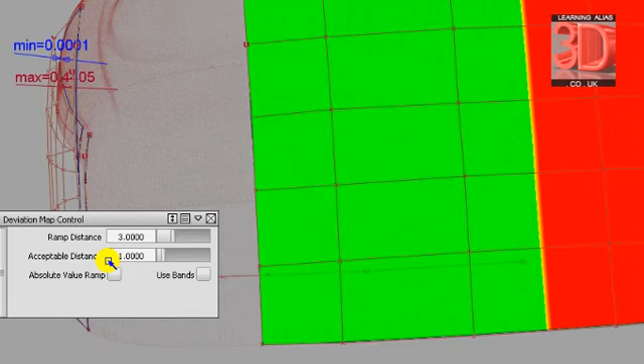You can see that with a mesh tolerance set at 1mm, everything looks good here. But when you take a good look at this surface, you'll see that the CV hull distribution is very erratic. So let's show you how to rectify that now.

So get it into the view so you're looking straight at it, but perpendicularly. Take the Planarize Hull tool and we're going to select all.

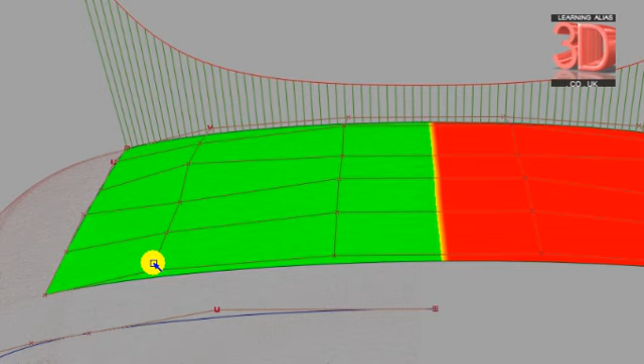You can see in this view that CV is too high. In fact, this row of 3 CVs is too high and this is too low. So that one's too low. So let's just sort that out using NUV here.

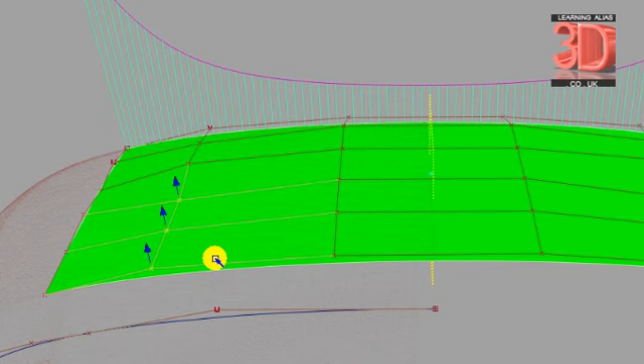Come over here now and use smooth control. Factor 2 is okay, and smooth, and save. So we should have very nice CV distribution. Now you can see we're still within 1mm mesh tolerance.

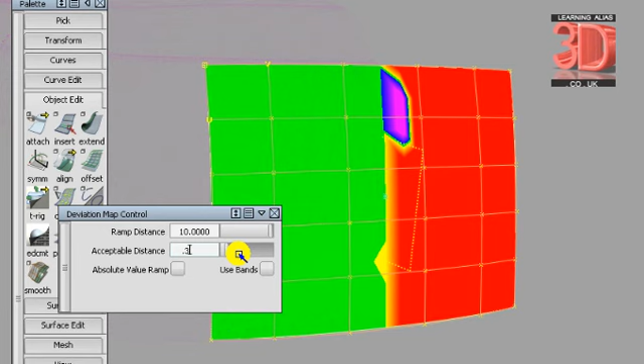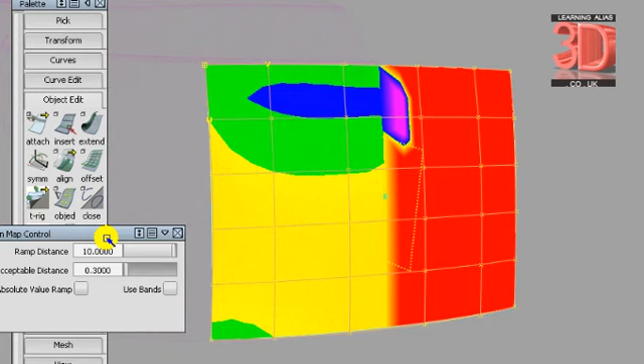Okay, let's change this value to 0.3. Okay, now it looks a lot different, and this is how I normally work, at 0.3. If I work at 0.3 I'm going to get really smooth highlights, even though my boss might be asking me to clear better than 1mm mesh tolerance. So this tends to be the way that professional modelers work.

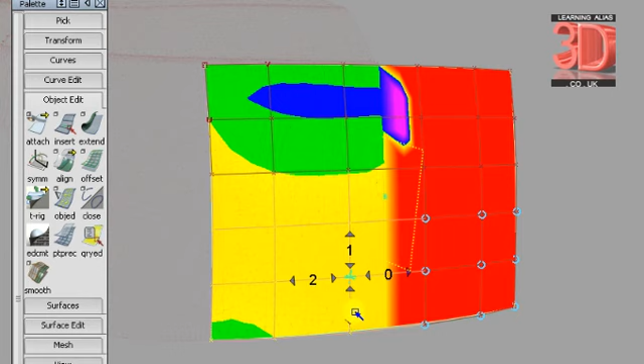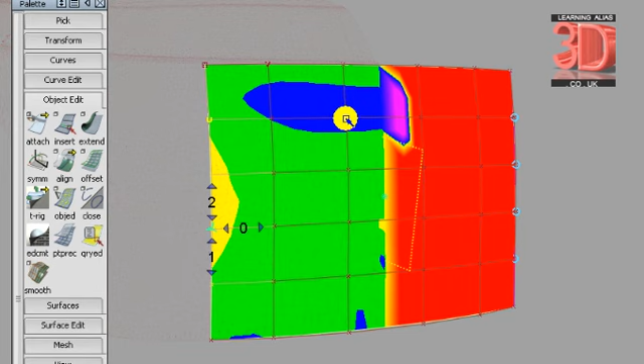So I'm just going to go CV, proportional modification, mouse sensitivity 250, and I think we're good to go there. Got symmetrical modeling on, so I don't have to use this really. I could just pull one CV at a time, to be honest with you.

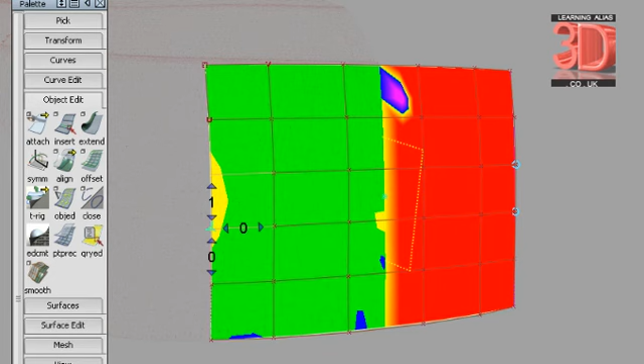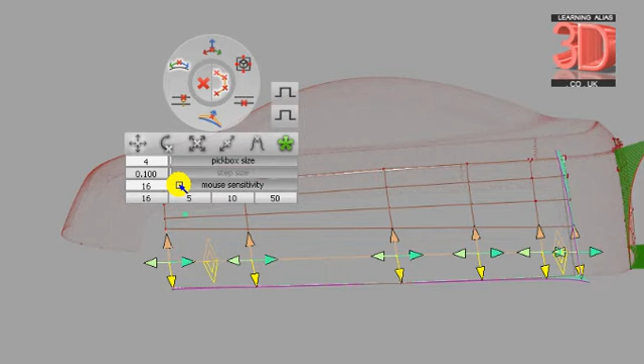You may have your draft surface built right down here, and you don't need that. You want this boundary edge pointing directly at that point there. So let's just pick slide, and you want a bit of sensitivity, about 16, something like that, and pick that diamond and just slide your hull up there.

If you pick this, it will slide the whole thing in parallel, but we want to skew it, so we're going to do it like so. So I'm pointing the arrow at this edge of the mesh. Okay.

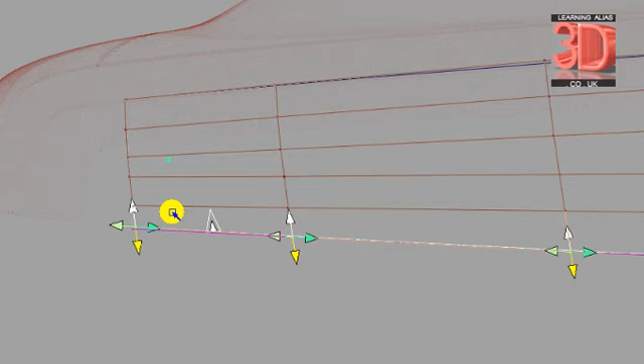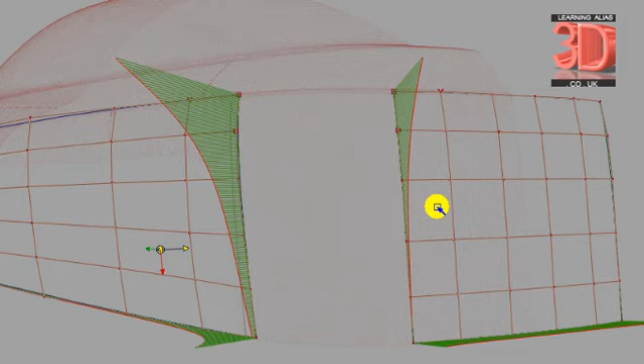So I have a similar character here and here on these two boundary edges, and I want to look to see if they're going to flow round and marry up. It's getting a bit closer. And so we're looking at the arrangement of these hulls there, and I can see there's a bigger gap there than there should be. So let's put in a freeform blend there now. Surface, freeform blend.

Okay, I need to lift this a little bit. And the reason it isn't moving is because I went up here earlier and I suspended rebuilds. So put that back on again and it will make more sense. So as I move that, you'll see that this is moving up now. And we're getting a better alignment, so let's have another look.

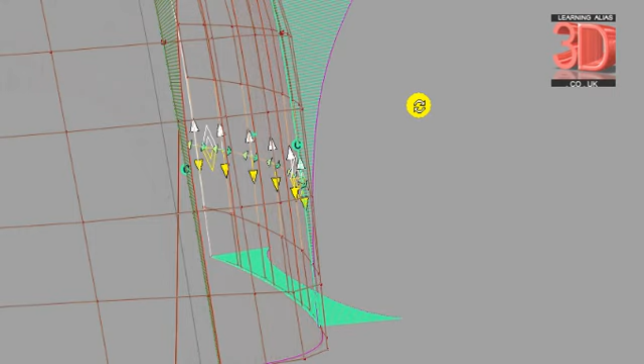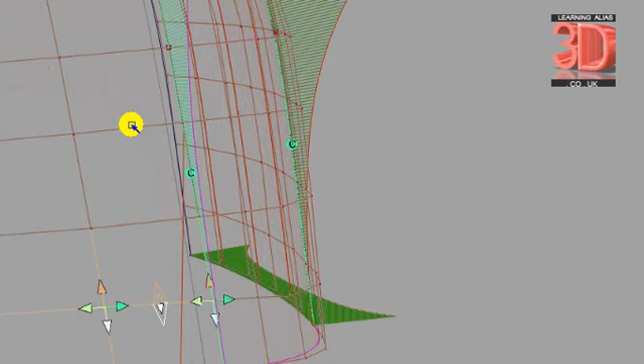So now I'm looking kind of around here, and you see it's dipping a bit there, and I'm going to bring that down a bit, till I get that smooth look that I want. Okay, I like that. So come around, and yeah, it's looking much better.

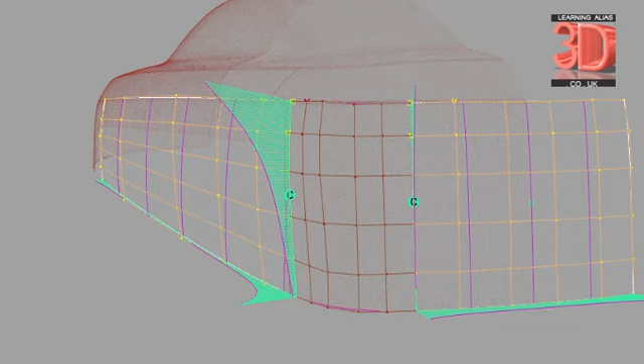I've got some cross sections there that I don't need anymore, so I'm going to come down here and pick the cross section editor. Just hit clear, and it gets rid of all those cross sections which we're no longer using.

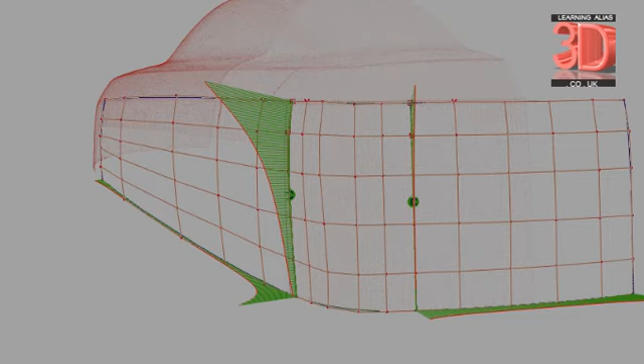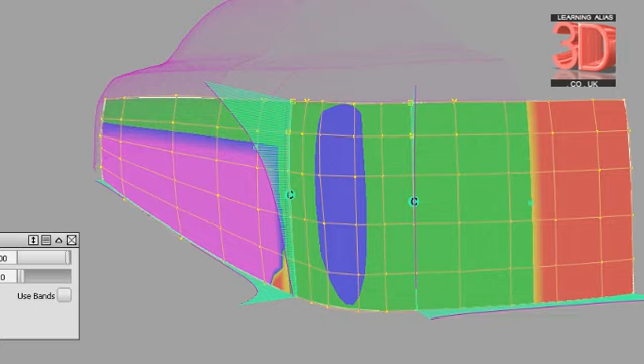Okay, let's have a little look at our deviation map. Let's set it to 0.7. Okay, and it looks okay, apart from this area here, which, as you can see if I come over here, is below the mesh.

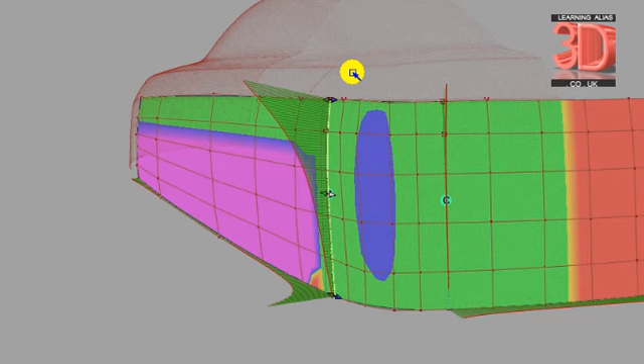So what I'm going to do is take the extend tool with merge on, and I'm going to pick the plane and just gradually tweak that in there. I'll go over here and share some of the work. Okay, job done. And there you are, perfect.

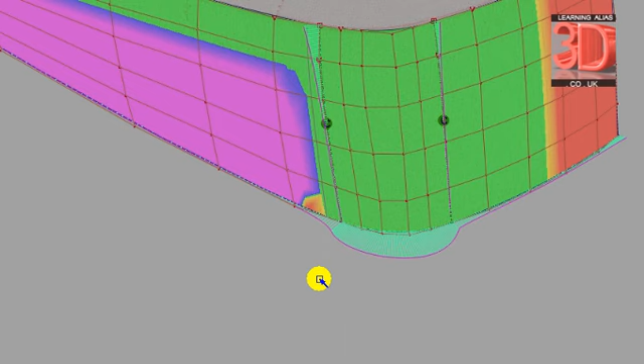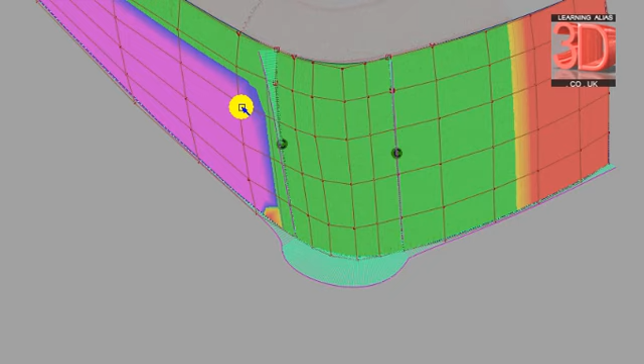This is G3 and that is G2. You see it has a hard edge there. Let's zoom in a bit for you. The hard edge is G2, this smoother feel is G3. If you want to get G3 here, then what you have to do is do what I did over there, and you have to slide the hulls this way.

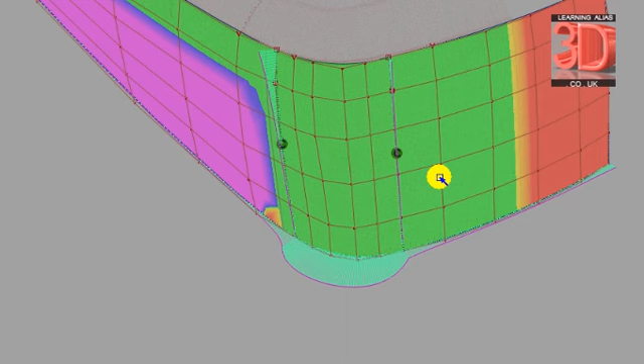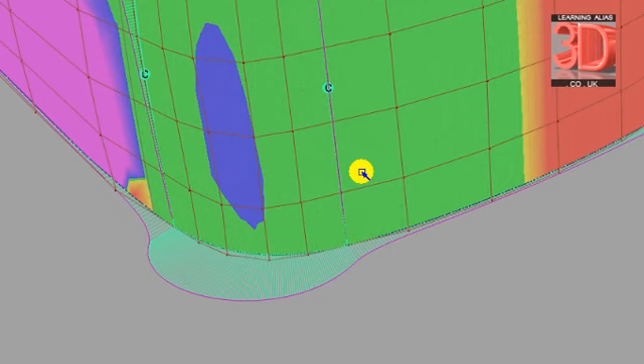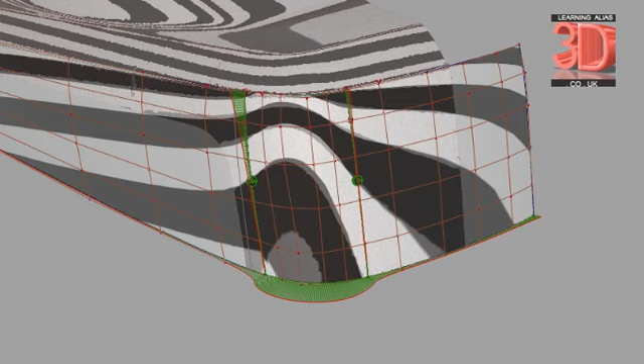In fact, I'll give you a quick demonstration there. Slide. We'll give it about 50. Make it a bit more sensitive this time. Okay, so there you are.